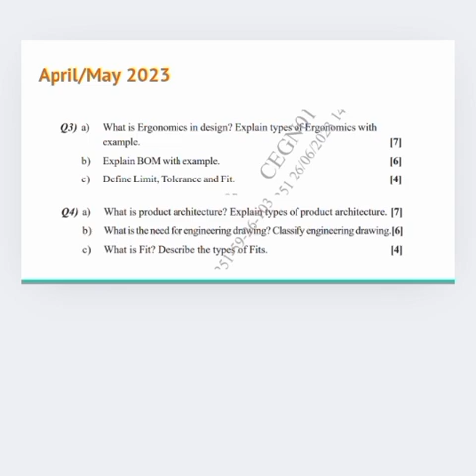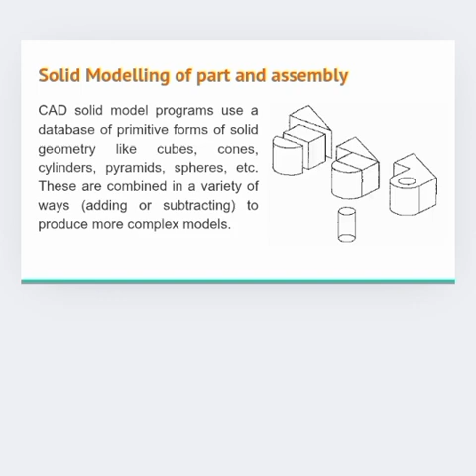CAD solid model programs use a database of primitive forms of solid geometry like cubes, cones, cylinders, pyramids, spheres, etc. These are combined in a variety of ways of adding or subtracting to produce more complex models. This gives a well-defined model.

All volume, surface, and angles are well-defined and known, unlike surface modelers or wireframe modelers, since all solids are represented inside the system as the combination of primitives or parts of primitives. A task like calculating the volume of complex space presents few problems.

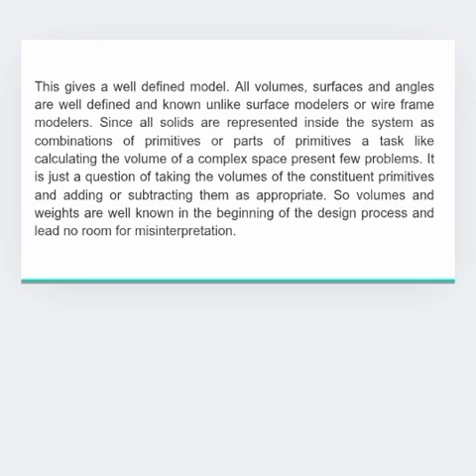The solid models represent the geometry and can be the base for engineering analysis because the geometry is well defined. This integration between CAD and engineering.

More iteration steps are possible during the design, so many changes during the design process are possible. This will help to optimize the product, which will give increasing product quality and reduction in product development time.

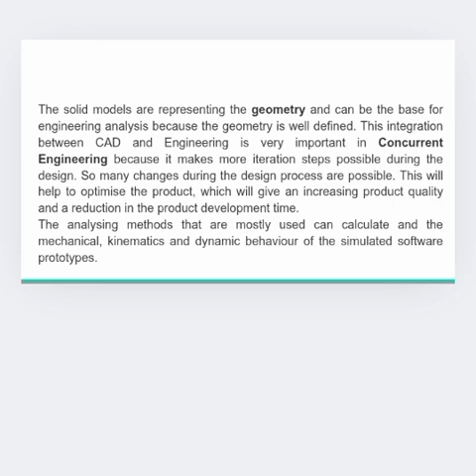Assembly modeling further builds on solid modeling by combining solid part models together into an overall assembly model. The individual part solid model data files describe the 3D geometry.

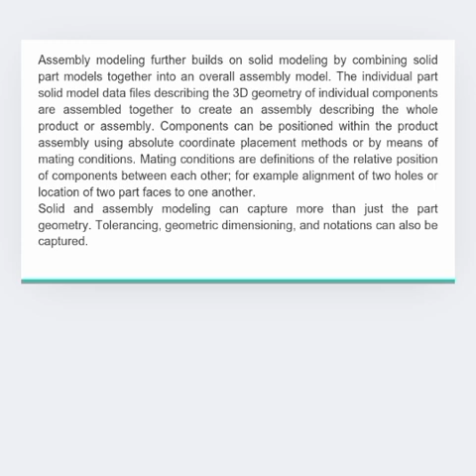Now let's move to Product Architecture. This is the second point. Product Architecture is the process of creating a schematic for a product and its various functions rather than representing the product as a prototype.

The product is broken down into its base components and expressed geometrically. This makes more apparent and better expresses the relationship between different elements.

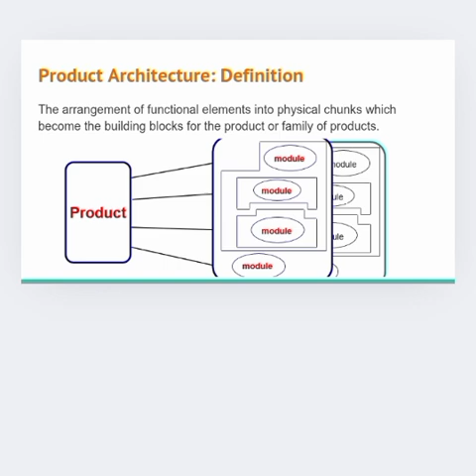Other terms for chunks or elements that make up a chunk: subsystem, cluster, module, building blocks - interfaces connect these chunks together. The next one is the architecture.

The architecture of a product is the scheme by which the functional elements of the product are arranged into physical chunks and by which the chunks interact.

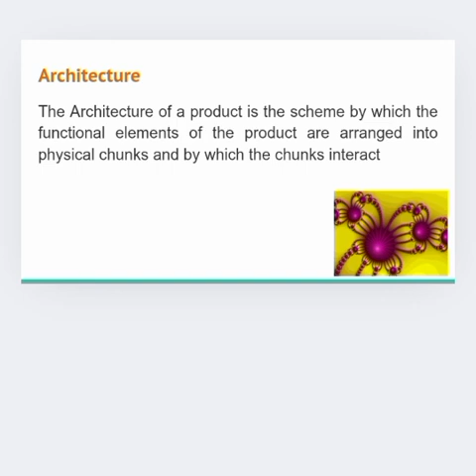Product architecture is determined early in the development process. This is not a linear sequential process.

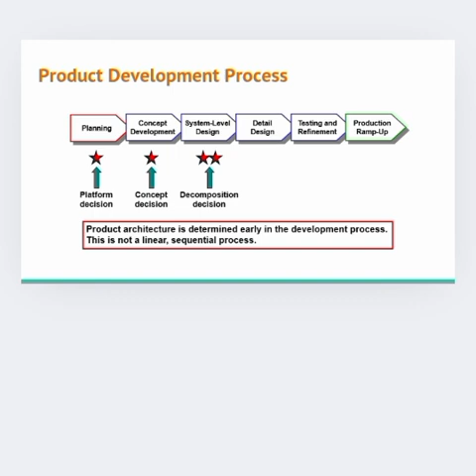Architecture decision: functional elements, modularity, interfaces, product platform, cost and manufacture, product development, management.

The next one is that choosing the product architecture decision relates to product planning and concept development decision.

Modular product architecture: chunks implement one or few functions entirely. Interaction between chunks are well defined. Modular architecture has advantages in simplicity and reusability for a product family or a platform.

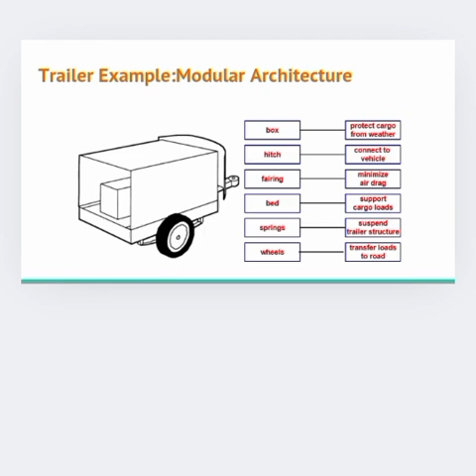Trailer example of modular architecture. Integral architecture.

Integral product architecture: functional elements are implemented by multiple chunks, or a chunk may implement many functions. Interactions between chunks are poorly defined. Integral architecture generally increases performance and either reduces or increases cost for any specific product model.

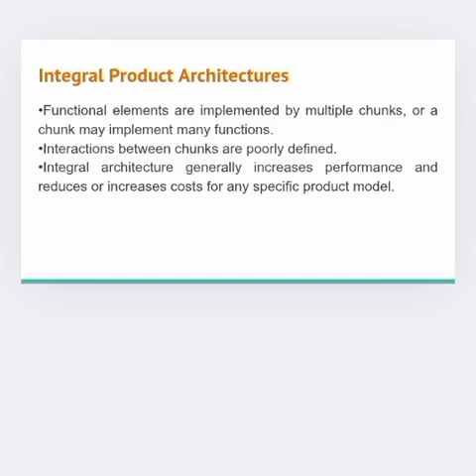Steps to establish the product architecture: create a functional model or schematic of the product, cluster the elements on the schematic, make geometric layouts to achieve the types of product variety, and identify interactions, both fundamental and incidental.

Design for assembly. The DFA methodology was pioneered by Boothroyd at the University of Rhode Island. The method is a design evaluation tool that enables designers to reduce product assembly cost. DFA is primarily a cost-saving tool concerned with minimizing the part count, the number of assembly operations needed to produce the part, and making assembly operations as easy and fail-proof as possible. DFA reduces the number of opportunities to fail in any assembly operation, which automatically leads to improved design and manufacturing quality as well as significant cost reductions.

Design for assembly principles. The main principles of DFA to keep in mind are: minimizing part count, modularity, built-in fasteners, part symmetry, mistake proofing, use of standard parts, and use of reasonable tolerance.

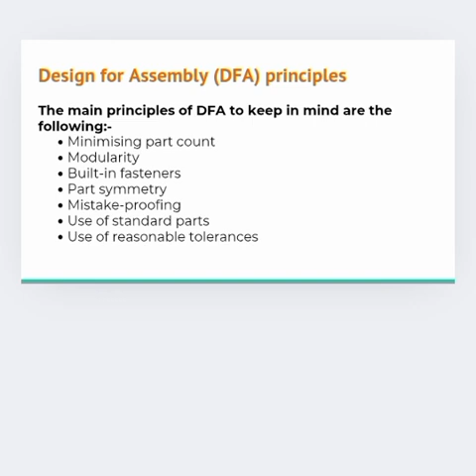Considering all these aspects throughout the product development phase will ensure lower overall manufacturing cost, in turn increasing potential revenue. While DFA may seem very much producer-centric, many of these features will also be appreciated by the end customer.

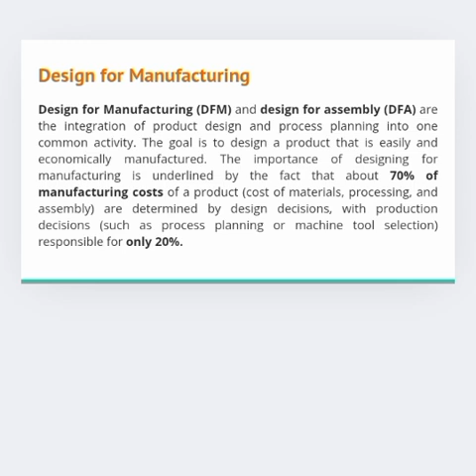Reduce the total number of parts. Develop modular design for process, DFX. Design for sustainability, design manufacture assembly, design for manufacturing assembly, and design for reliability.

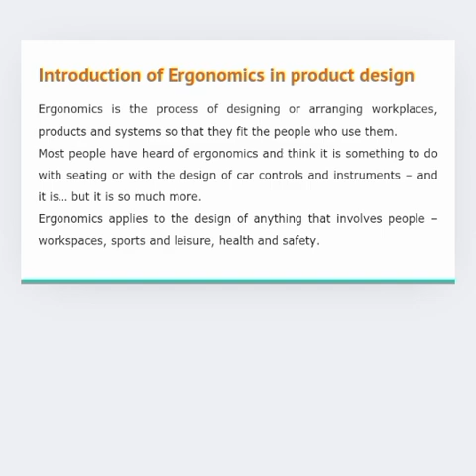Introduction to ergonomics in product design. Ergonomics is the process of designing and arranging workplaces, products, and systems so that they fit the people who use them. Most people have heard of ergonomics and think it is something to do with seating or with the design of car controls and instruments, and it is, but it is so much more.

How does ergonomics work? It involves anthropometry - body sizes, shapes, populations, and variation; biomechanics - muscle, lever forces, and strength; and environmental physics - noise, light, heat, cold, radiation, vibration, and body systems like hearing and vision.

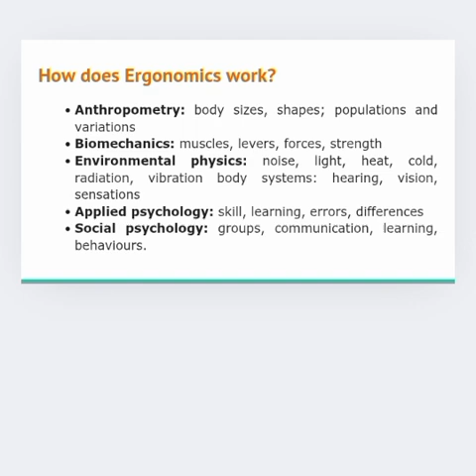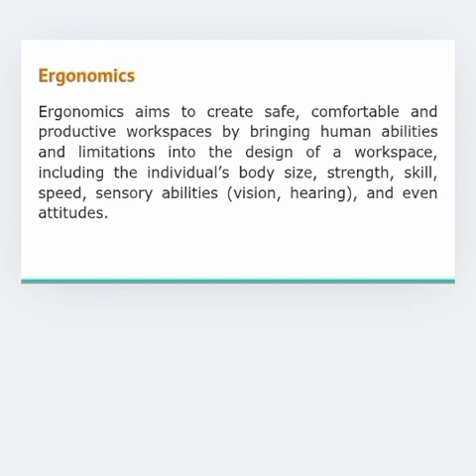Ergonomics aims to create safe, comfortable, and productive workspaces by bringing human ability and limitation into the design of a workspace, including individual body size, strength, skill, speed, sensory ability, and even attitudes.

Economic ergonomics in product design: design review and part print analysis. The ideas of product design are conveyed to those concerned with transferring them into the physical product using part drawings, blueprints, and part prints. The process engineer must consider two important questions: what does the product designer want, and what must be done with the information disclosed by the part print to get what is wanted.

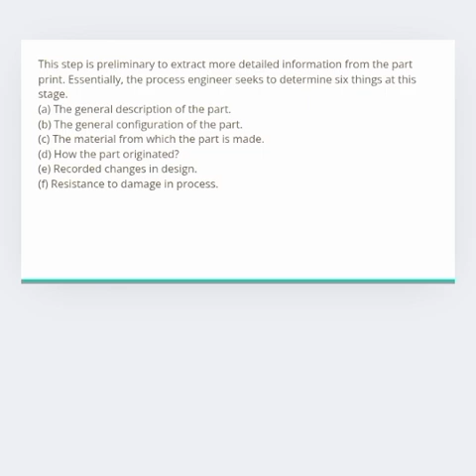This step is preliminary to extract more detailed information from the part print. Essentially, the process engineer seeks to determine the general description of the part, the general configuration of the part, the material from which the part is made, how the part originated, recorded changes in design, and resistance to damage in process.